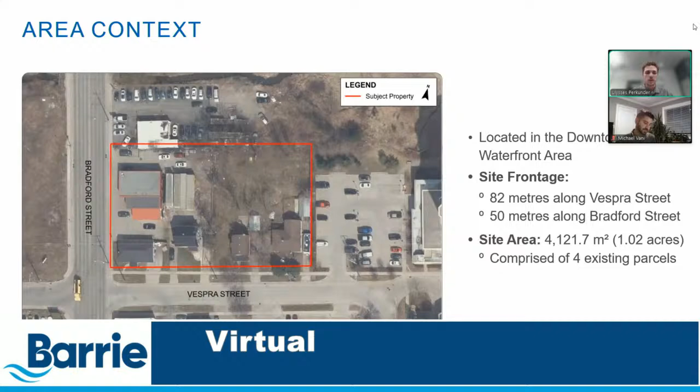Obviously, you all know the community well, but to provide context, this site is located in the downtown waterfront area at the northeast corner of the Bradford and Vespra Street intersection, just south of Bunkers Creek. The site is comprised of 4 parcels with a total area of 4,121 square meters, or just over 1 acre.

The site is located within the urban growth center and along an intensification corridor, where the highest levels of height, growth, and intensification in Barrie are focused. There's a minimum population target of 150 people and jobs per hectare, with a vision for achieving a complete community through mixed-use built forms, such as the development being proposed.

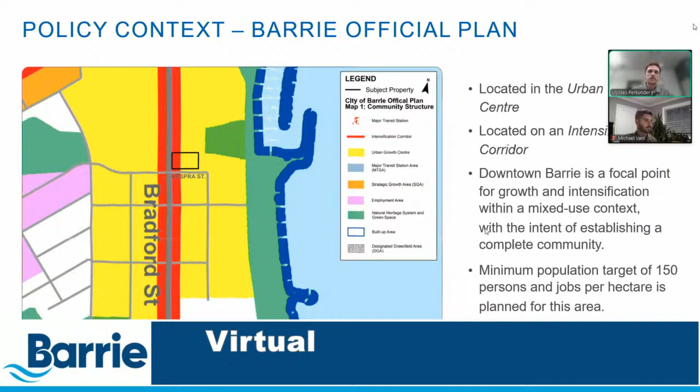Furthermore, the official plan designates the site high density, permitting a mix of residential, institutional, and commercial land uses, with a minimum density target of 300 units per hectare.

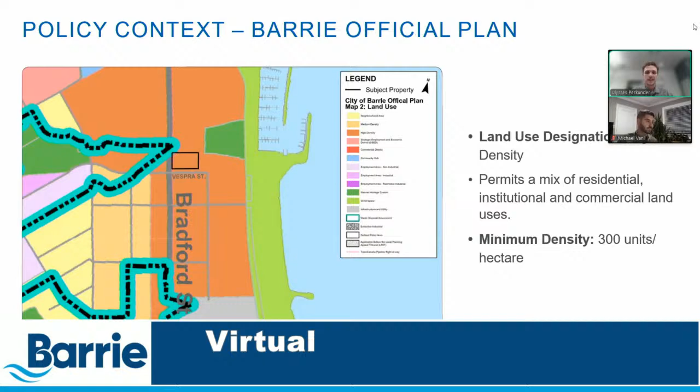Moving on to the zoning bylaw, the site is Zone C4, general commercial, permitting a mix of commercial, institutional, and minimal residential uses, with no maximum gross floor area.

As mentioned earlier, the proposed development is a 36-story mixed-use high-rise building with a gross floor area of 27,925 square meters. 374 square meters of retail space is located at grade, fronting the intersection as seen on the concept.

The building will contain 462 total units, comprised of 371 single-bedroom dwellings and 91 larger units containing 2 or 3 bedrooms. 320 vehicular parking spaces are located within the podium at a rate of 0.69 per unit, and 587 bicycle parking spaces are provided, including 531 located indoors, reflecting a rate of 1.27 per unit.

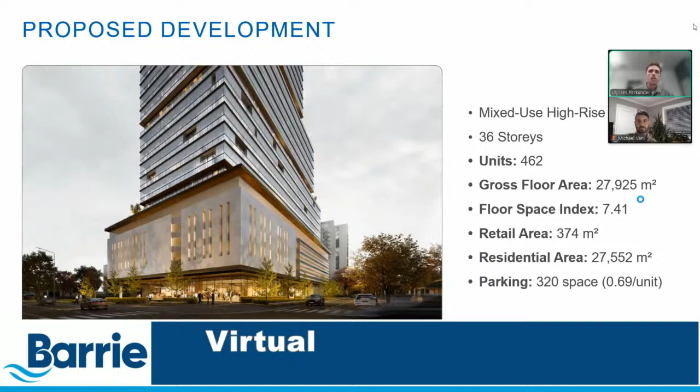We might jump ahead a bit given how many times I clicked it, but pending that, the primary residential lobby access and indoor amenity space is located along Vespra Street, achieving an active streetscape, while retail space fronts the southwest corner of the site, with a focus along Bradford Street. A 7-meter road widening is also accommodated. Parking and loading areas are accessible from Vespra Street, located away from the streetscape at the rear, while a landscape buffer is provided along each of the side yards.

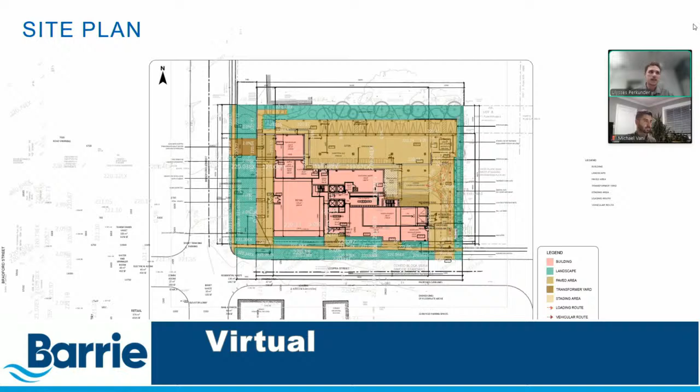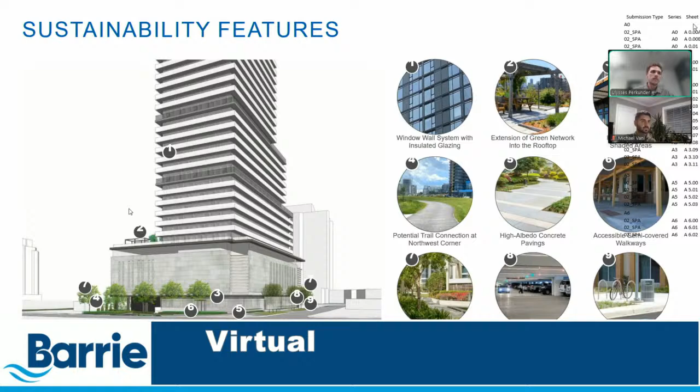The proposed zoning bylaw amendment seeks to rezone the site to the C1 Central Area Commercial Zone, with site-specific exceptions including a building height of 122 meters, gross floor area of 741% of the lot area, parking rate of 0.69 spaces per dwelling unit, a 9% coverage for commercial uses, and a 2.05 meter landscape buffer along the rear lot line.

To provide some context on the timing of this development application, the formal submission was made on September 11th of this year, with review by departments and external commenting agencies currently ongoing. Once this feedback is provided, the project team will undertake the process of addressing any matters raised through resubmissions, and once all items have been addressed, staff will prepare a final recommendation report for the application to be considered by the Affordability Committee and City Council.

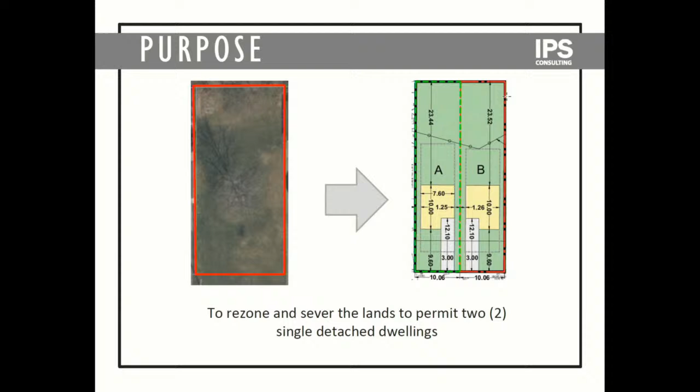So the surrounding uses include low-density single detached dwellings along Ottaway Avenue, Highway 400 to the north, and Barrie North Collegiate to the south. The site is also within walking distance to parks and local amenities. Oakley Park Public School with an attached park is located to the southeast, MacMorrison Park to the east, commercial plazas on both Cundles and Bell Farm to the east, and Barrie Public Library to the south. Next slide, please.

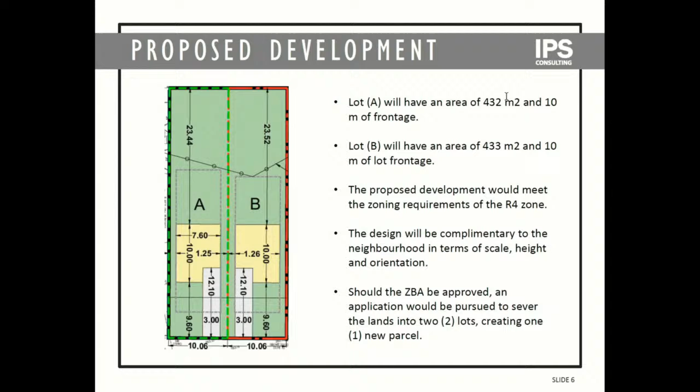The lot statistics and breakdowns are provided here with a conceptual sketch of what the homes may look like. Once again, these are just for illustrative purposes. The houses will be designed at a future stage. Though the proposed project is for 2 single detached dwellings only, the application seeks to rezone the lands to R4 in order to accommodate the increased density. And the proposed houses will meet all requirements of the R4 zone, so no special provisions are requested. Next slide, please.

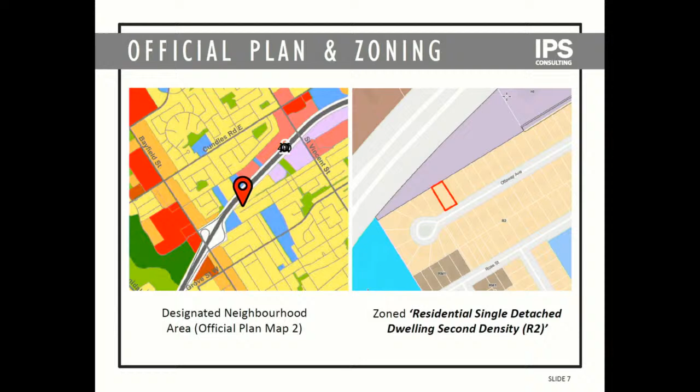So the lands are designated neighborhood area and currently zoned residential single detached dwelling second density, or R2. No changes are proposed to the official plan designation. Next slide, please.

The City of Barrie third draft zoning bylaw was released by the city in 2024. The proposed zone for this site is neighborhood low 1. Under the draft bylaw, houses, townhouses, and low-rise buildings are permitted as of right, and low impact intensification is permitted. Next slide, thank you.

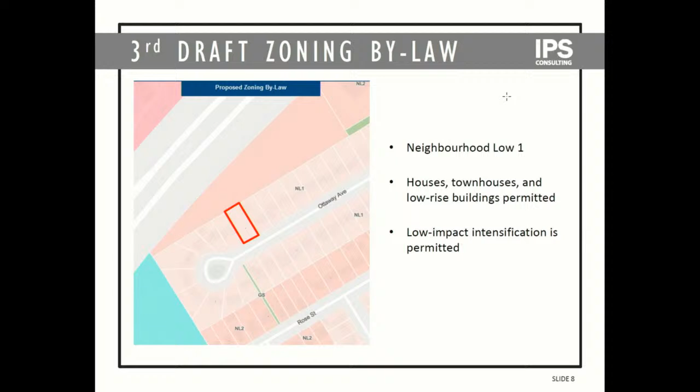Several reports and studies were completed and submitted as part of the formal application, including the planning justification report, the site and concept plan, the geotechnical review, the arborist assessment, the grading and drainage plan, and the water service supply/demand analysis. These studies were identified as required by the city during the pre-consultation phase. They were completed by professionals, including arborists, engineers, and planners. They have already been reviewed by the city, by the respective departments to ensure accuracy, and there are no outstanding studies at this time. Next slide, please.

To conclude, the proposed zoning bylaw amendment would permit the development of 2 dwellings at 12 Ottaway Avenue. It would also facilitate the severance of the 1 lot into 2 lots for a total of 1 new lot. Both provincial and municipal policies support infill development and appropriate intensification within the built-up area. The proposal helps with the current housing crisis by providing more housing in an area with existing infrastructure to support it. Overall, the development aligns with both provincial and municipal policy and objectives, and we believe that it constitutes good planning.

Thank you very much for your time tonight. Kyle and I will be happy to answer any questions or address any concerns at this time. Thank you.

I will now call upon Rachel Mulholland, planner from the Development Services Department, to provide an update on the status of the application.

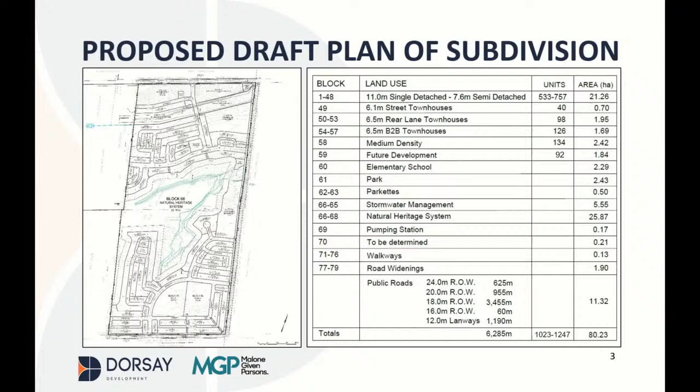The other major features are one school, as per the official plan, in the south end with a park right next to it. In the north end, two parkettes are shown, one in the very center of the residential area, and one in the medium density area, which we think is important so that people there have amenity space and parkland they can use as well. That is the overall summary of the uses within it.

In terms of the density range, the policy that applies to this land provides for a minimum of at least 55 people and jobs per hectare. Currently, the plan as proposed has a range of approximately 58 to just over 70 people and jobs per hectare. So we're doing a bit more and a bit better than the minimum density in the official plan.

Again, most of those units, or quite a few of them, are single and semi-detached units, and you can see the breakout on this slide of that. There are also work-at-home jobs anticipated here, as well as jobs from the school, and that totals to the combined people and jobs per hectare.

There is also a potential phasing and lotting plan. It's a fairly big plan, so it won't build out in one go. The green areas at the top end of the plan are where development would start, going generally from north to south. The blue area would be the second phase, with orange being the third phase.

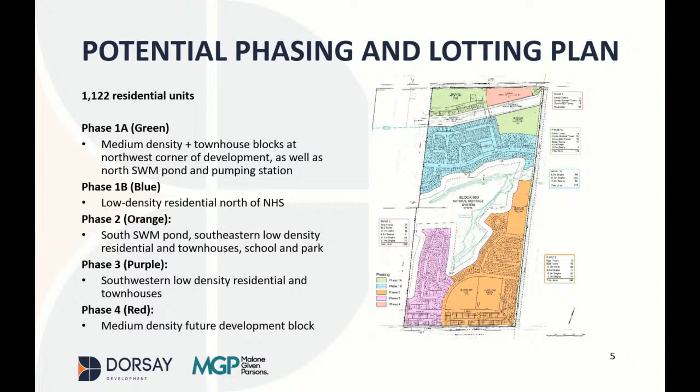As part of that phase, we made sure the school block and the storm pond are there, so that when that block starts to get built, the residents are having the school and the park delivered in a timely way. The last phase is purple, and the very last is red—I'll get into the reason for that in another slide. The official plan land use designation is generally neighborhood area, with a mix and range of housing types permitted, and we are proposing housing types that conform to that.

The natural heritage system, as I mentioned, is protected—you can see that in the green over the site. I always find it good to explain this, especially for the public: those aren't green space in terms of natural heritage system, those are green spaces in general. They would incorporate stormwater management ponds anticipated by the Hewitt secondary plan and background work, as well as the parks that would be anticipated.

We've generally provided the parks in the locations and the school, as you can see in the blue there, as per the official plan. One or two of the storm ponds have moved around a bit, but that is permitted by the policies of the plan, dictated more by the physical realities of the site than policy context. This is a site-specific policy approved into your official plan for this property because it's at the very edge of the Hewitt secondary plan. It allows single and semi-detached units, all forms of townhouses, and a minimum density of 55, which we're surpassing.

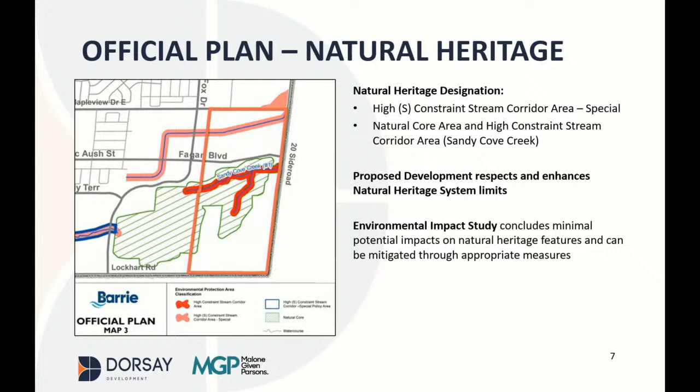I won't dwell on this—this is natural heritage, which I already talked about. This is just the detailed mapping. You can see that both the high constraint stream corridor and the natural core, as per your official plan, have been identified properly and protected.

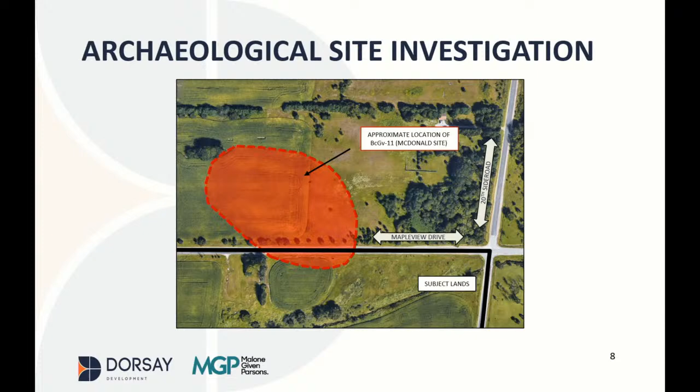There is an archaeological site called the McDonald site. It's a former Huron-Wendat village located predominantly north of Mapleview off our property, but there is a portion anticipated to be on our property. That is subject to continued and ongoing archaeological work—Stage 3 work is being undertaken and completed continually now. Ultimately, no development could happen on that area, or any area related to that archaeological site, until Stage 4 archaeological work had been completed.

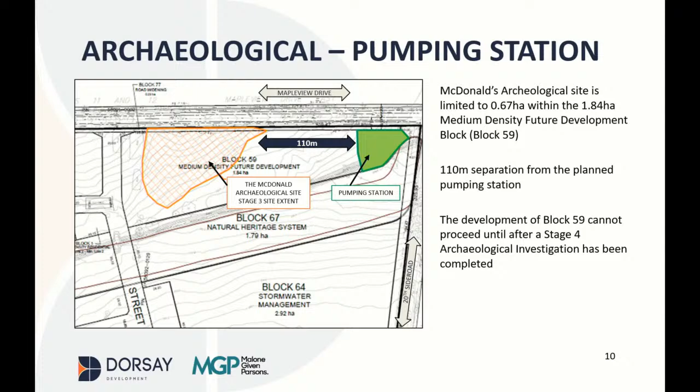In the most current draft plan—and I should note the draft plan before the public is a slightly older one—the most current draft plan will show that as a future development block, and it will be subject to provisions requiring that nothing can happen there until the proper archaeological work has been completed to the ministry's acceptance.

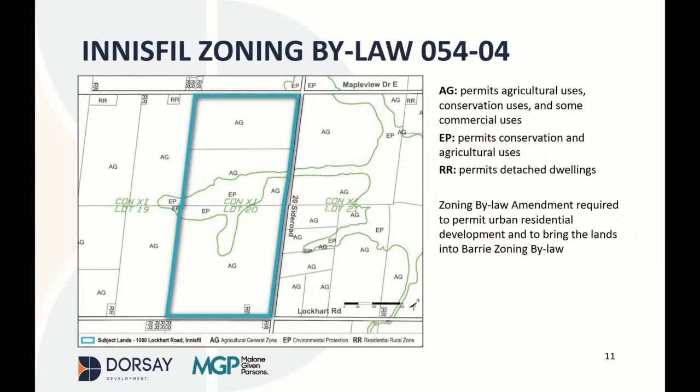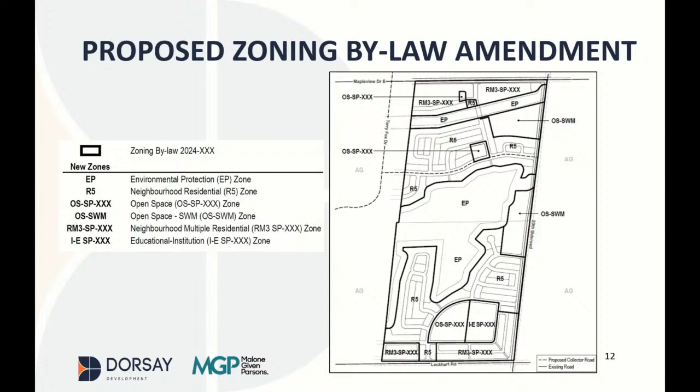Briefly on the Innisfil zoning: it's currently in the Innisfil zoning bylaw, the former annex lands bylaw 054-04, which generally permits ag and rural uses. The proposed zoning amendment, as per your existing bylaw rather than the comprehensive zoning bylaw being considered by the city, would zone the site accordingly with current standards. That's generally the R5 neighborhood residential zone, open space zones for stormwater management blocks, environmental protection for environmental areas, education and institution for the school site, and for medium density areas, neighborhood multiple residential RM3 with a site-specific exception. These are the zone standards.

I won't go through all of them, but they're very typical zone standards and generally consistent with the zoning currently in place in these zones, and with the direction the city is going in its comprehensive zoning bylaw. The last public meeting, the question was height. For most of it, it's 3 stories, in keeping with the official plan permissions for single and semi-detached dwellings, and 4 stories for townhouse and medium density dwellings. The other standards are fairly standard relative to the zone. And then the OS zone for stormwater management, the EP, the natural heritage OS, and the IE zone, again with fairly standard provisions as per your bylaws.

Thank you. I'm really happy to be here tonight. It's been a long journey. Very eager to hear from the public and get comments so we can move forward in a timely way. And very happy to answer any questions if there are any.

Thank you. I will now call upon Tyler Butler, Planner for Development Services Department, to provide an update on the status of the application.

Good evening, Chair Harris and members of the Affordability Committee. Thank you to Matthew for giving that presentation detailing the application. A memorandum was also provided to committee to describe the application, and I will provide an update regarding the status of those applications and the primary land use matters being considered by staff at this time. So the purpose of the amendment is to facilitate the associated approval of a draft plan of subdivision for the construction of the residential subdivision, including blocks for future school, open space park areas, and associated stormwater management.